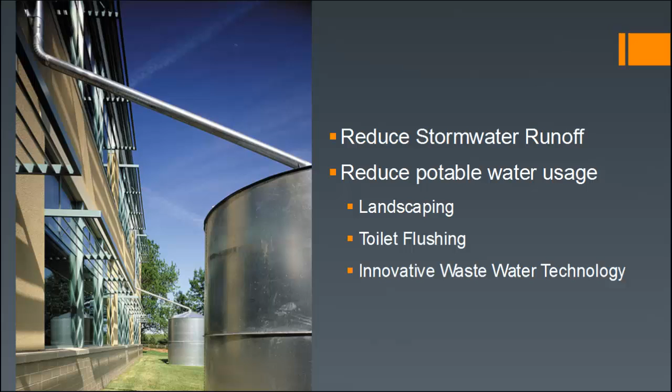Rainwater harvesting can reduce potable water usage for your landscaping and toilet flushing, which also has a synergy with the wastewater technology innovation credit. And as mentioned, it helps reduce your stormwater runoff, which has a synergy with Sustainable Sites Credit 6, stormwater management.

You always have to do a cost-benefit analysis of your sustainable strategies and products. In this case, you have to look at how rainwater harvesting interacts with a sustainable design strategy such as a green roof. On a conventional roof, only 20% of the rainfall evaporates, so it's a rainwater collection factor of 0.8. A green roof with 3 inches of soil has 33% less runoff, and so a rainwater collection factor of 0.65.

And for a green roof that has 5 inches of soil and maybe more vegetation, there's 54% less runoff, meaning that the rainwater collection factor is only 0.38. So it's half of what you would be able to collect from a conventional roof. So when you're doing your water budget calculations to see how much you need to collect to flush your toilets, use for irrigation or janitorial type of situations, you need to take into account what your roof is made out of.

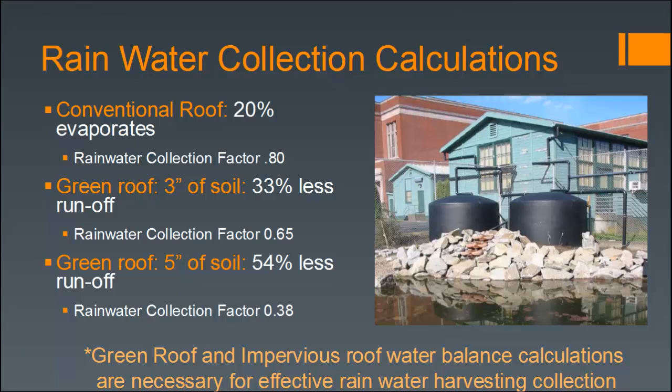Rainwater harvesting can be on multiple scales. On a commercial scale, you typically use a cistern, as pictured on top. This is a school in Seattle on the right, using it as an educational kind of art feature in a main circulation area. And down below is more of a residential scale rain barrel that just has a screen input, flexible transparent hose, and then a barrel level meter showing you how much water you have left.

In the bottom right corner, you can also see it used as an aesthetic feature in an area on a campus. This also shows you can collect water from flow-through planters and things on the landscape as well. It doesn't have to just come from your roof. Next slide.

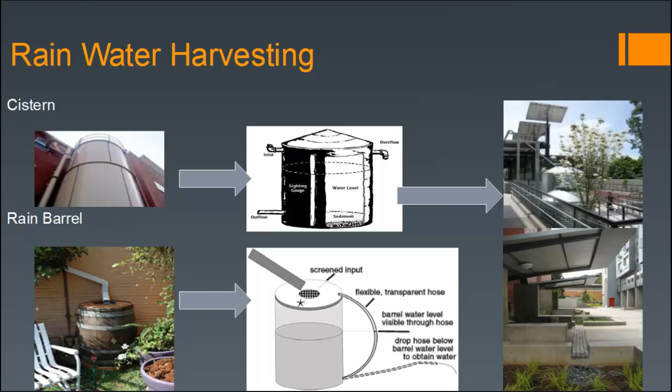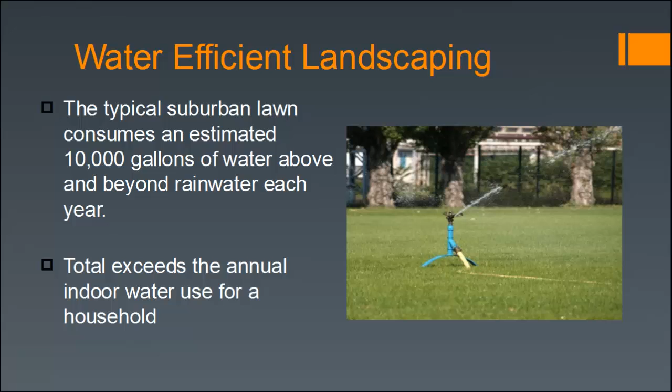Water efficient landscaping is an important topic to address because the typical suburban lawn alone consumes an estimated 10,000 gallons of water above and beyond the rainwater each year. This total exceeds the annual indoor water use for a household in total. That's why the first credit in the water efficiency category is water efficient landscaping, and it was more heavily weighted in LEED 2009 version 3. There are 2 to 4 points available for new construction, schools, and core and shell.

So the intent of the credit is to decrease the amount of potable water, once again that's our drinking water, used for landscaping. There really is a water crisis being addressed with this credit, since landscaping accounts for 30% of the 26 billion gallons consumed daily. Up to 50% of the water applied by irrigation systems is lost in wind, evaporation, and improper maintenance and installation. I'm a golfer, not to pick on golfers, but this image really shows how much water can be lost due to those factors.

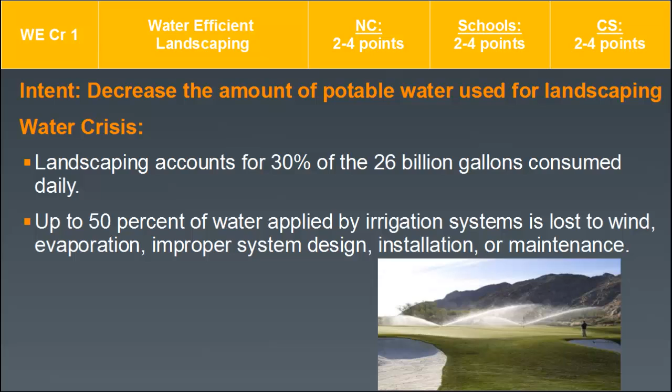The requirement for option 1 to earn 2 points is to reduce potable water consumption for irrigation by at least 50%. This is based on the midsummer baseline. There are various strategies to accomplish this goal through efficient irrigation systems, even moisture sensors, drip irrigation, captured rainwater and reuse, recycled wastewater, possibly through treatment on site, and carefully picking your plant species, density, and microclimate factor. You can also use imported gray water from a public agency.

The LEED Neighborhood Development pilot project I worked on in Dubai was considering this, since on a municipal level they have a gray water treatment facility used primarily for irrigation. So in dry climates, this is very important to consider and advocate for on a district or city level.

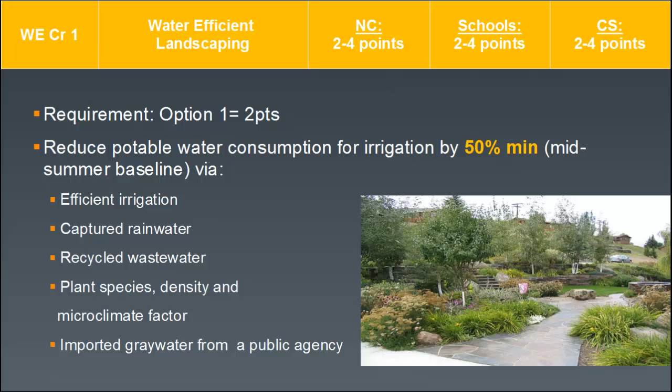To achieve the full 4-point potential, you can use any combination of the methods in option 1 so that only captured or recycled water from on-site or imported sources is used. So advanced gray water treatment is one example. This has a planter bed that is being irrigated from gray water reuse from the shower, potentially dishwasher, but not in most jurisdictions, going to a septic tank, sand filter, and a pump pit with some overflow available for even recharging the aquifer before it goes to the planter bed itself.

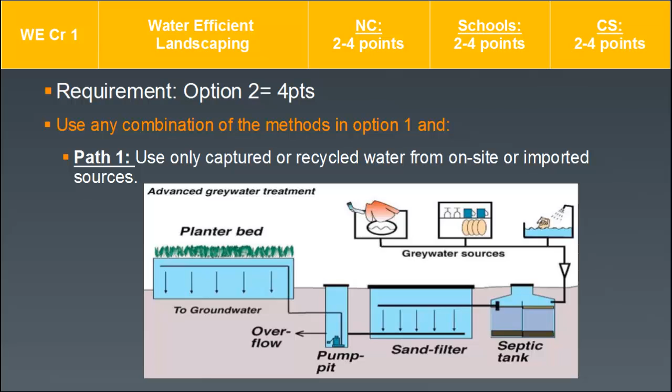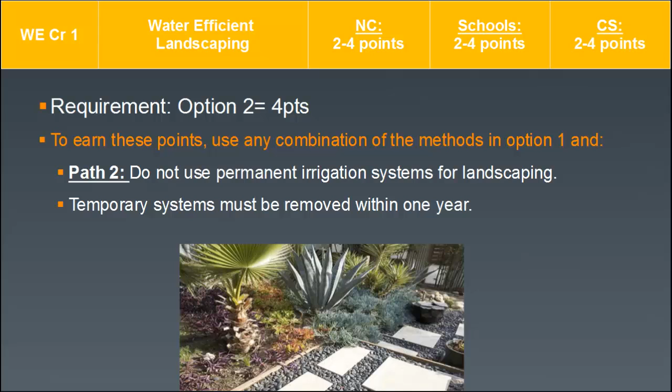Path 2 is to not use a permanent irrigation system for landscaping. There is an exception for temporary systems that are removed within 1 year, and there's a possible addendum for even a year and a half. In order to not need any permanent irrigation, it really takes proper planning and understanding native species that are available for your climate.

Xeriscaping is a type of landscaping that reduces or eliminates the need for irrigation. It's based on 7 principles: proper planning and design, soil analysis and improvement, appropriate plant selection, practical turf areas, efficient irrigation, the use of mulches to hold in moisture, and appropriate maintenance.

Note that buildings have to have at least 5% of green space over their total site area in order to achieve this credit. So you can't just get the credit by saying you don't have any irrigation because you don't have any plantings. Using potable water for irrigation because of public health code concerns, such as near swimming pools, is also allowed.

For schools only, applying this credit to school playgrounds and sports fields is optional. If it is included, you need to apply it to the credits consistently.

Strategies include a site map of existing buildings, sun and wind exposure, and that will help you determine 3 zones: high, moderate, and low watering. You don't want to overwater areas that only have low watering needs, and make sure that you concentrate water to the higher watering need areas. You need to diversify plants that will adapt to your bioregion and that are appropriate for these zones.

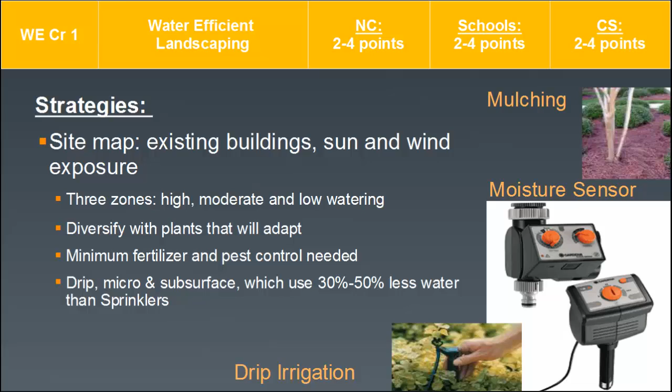Benefits include using native plant species. You have less maintenance since they're meant to be more durable in that specific bioregion. They require less fertilizers and pesticides, which is also a cost saver and lower maintenance. It helps with our waterways staying clean and the aquatic nature within those.

It can also shade hardscape, which can help with heat island effect, which is also a synergy with Sustainable Sites Credit 7. As you see here, that gets into related credits and synergies with site development, heat island, stormwater. It can also integrate bioswales and flow-through planters that help with stormwater design. And then optimizing energy performance as well, since some of these irrigation systems require more energy than others.

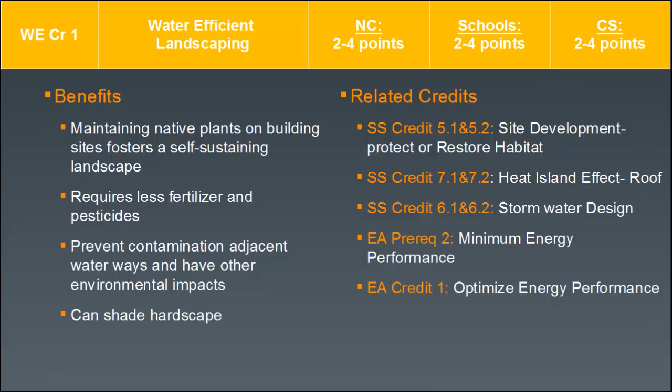It really needs to be regional specific. In hot, dry climates, drought-tolerant plants and even rocks can be used as landscaping. Xeriscaping replacing turf can be a huge cost saver. In hot, humid climates, native plants with moisture sensors have a better return on investment. And in cold climates, you want to pay attention to hardy native plants that can survive the harsher winters.

For operations and maintenance, you want to consider submetering, making sure that those are recalibrated and maintained. Site landscape maintenance plan. Gray water system manual with manufacturer contact info, and always educate facility managers that are new, and continuing education for facility staff that have been on for longer. You need to provide guidance to contractors about when and how to temporarily irrigate to establish plantings, to make sure that's done a proper way and that the temporary irrigation can be removed within 1 year.

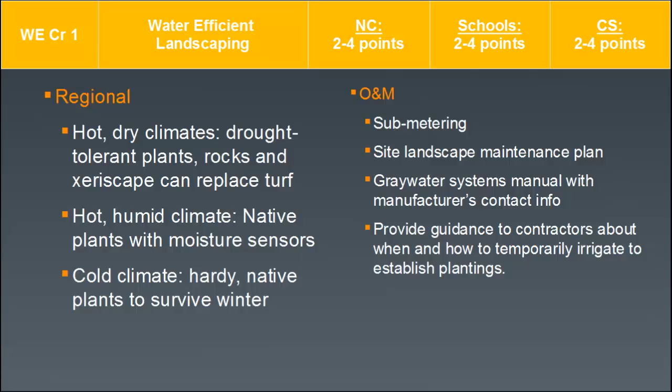For landscaping, there is a calculation that needs to be done to determine the landscape coefficient, which is the volume of water loss via evapotranspiration, and it's species dependent. 3 factors you need to take into consideration. The species factor is the variation of water needs. If there's no irrigation required, then the KS species factor equals 0, which means the landscape coefficient therefore equals 0, because it's a product of these 3 factors.

The density factor is the total leaf area of a landscape area. For example, 0.5 equals 25% ground shading from trees, which is low, and 1 to 1.3 equals trees and understory shrubs, which is higher.

So really the larger the planting, the higher that density factor. Microclimate factor, KMC, takes into account the environmental conditions specific to landscape, including temperature, wind, and humidity. This can be affected by where the plants are placed in relationship to even buildings on site. 1 equals evapotranspiration that is not affected by surrounding buildings. 1 plus equals increased effect from heat absorbing surfaces and wind tunnel effects. So large parking lots, high buildings, and other partitions and landscape features can have an effect.

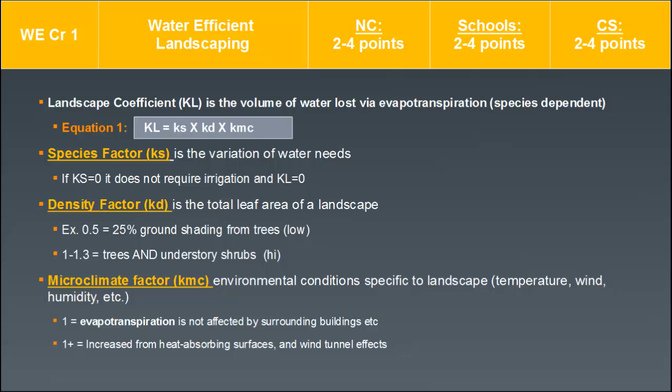First thing you need to do is calculate your reference evapotranspiration rate for the region. It's project specific and it's constant in both your baseline case and your design case. To determine your evapotranspiration for a project, you multiply your evapotranspiration for your project site times your landscape coefficient. Remember that site-specific evapotranspiration rate is constant for the baseline and the design case, the ETO, but the evapotranspiration for the project is specific to the landscape coefficient per the species chosen in that landscape plan.

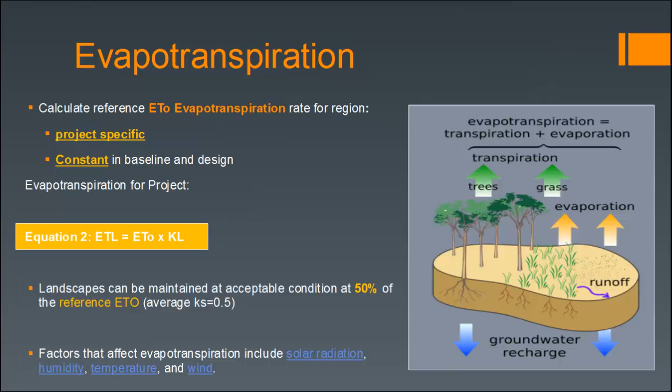Water efficiency credit 1, water efficient landscaping. 2 to 4 points available. Here are the calculations. Step 1, establish your design case. You need to sort the landscape into major vegetation types and determine those 3 factors for each zone. So that's your species, microclimate factor, and density. Then you need to calculate the landscape coefficient, which is equation 1, which we will look at.

Regional evapotranspiration rate, which can be found in regional agricultural data, and some irrigation controllers have that information included, such as the Rain Bird. You also need your project-specific evapotranspiration rate, which is equation 2 that we'll get to. And you also need to determine your irrigation efficiency. Now, if applicable, you have to include your controller efficiency, which could be moisture controls or weather-based controls. And if you're reusing any water, you need to include that volume. That could be rainwater harvesting, recycled gray water from your sinks and showers, or treated wastewater for things such as a living machine or anaerobic digester. On site, this is a really great reuse.

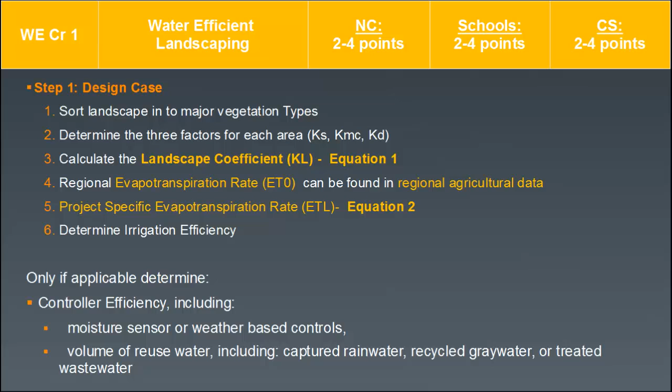Step 2, you need to establish your baseline case. So that's setting everything to average values. So your species factor, your density factor, and your irrigation efficiency are all set to conventional baseline standards. Things that remain the same for the design and baseline case are your microclimate factor and your reference evapotranspiration rate. From the baseline design case, you can then calculate the percent reduction. On LEED Online, this automatically tabulates for you.

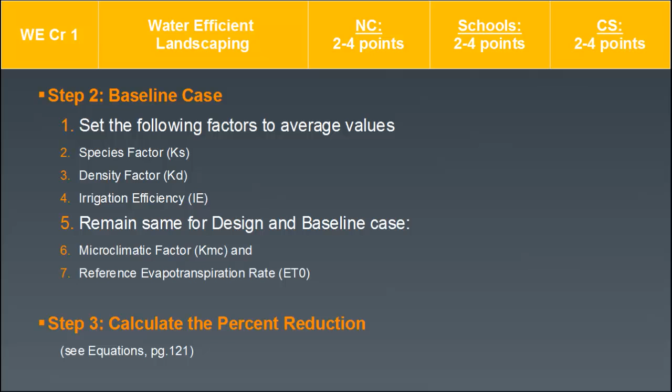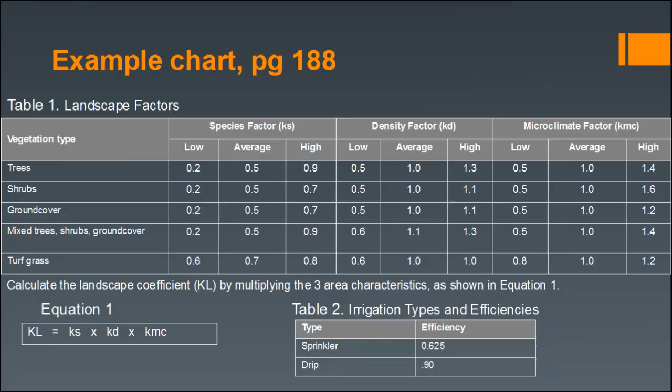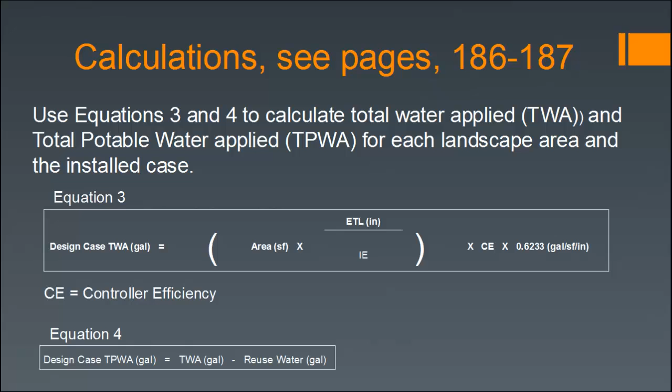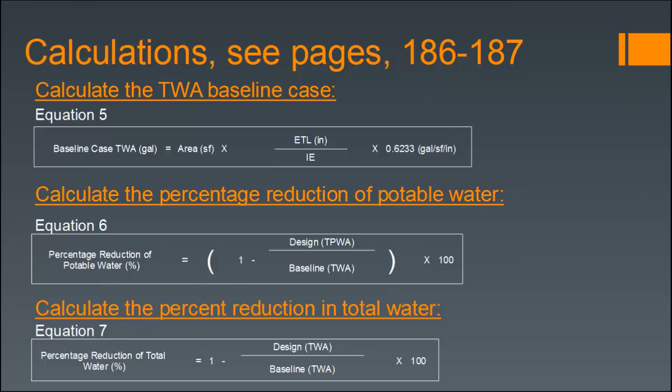For equation 5, you're calculating the total water applied in the baseline case, which equals the area in square feet times the evapotranspiration over the irrigation efficiency times the 0.6233 gallons per square foot per inch. Next, in equation 6, you're calculating the percentage reduction of potable water. So you have 1 minus your design total potable water applied over the baseline total water applied, times 100, and that gives you that percentage. Equation 7, you need to calculate the percent reduction in total water. So that's 1 minus the design total water applied over the baseline total water applied times 100 to get that percentage.